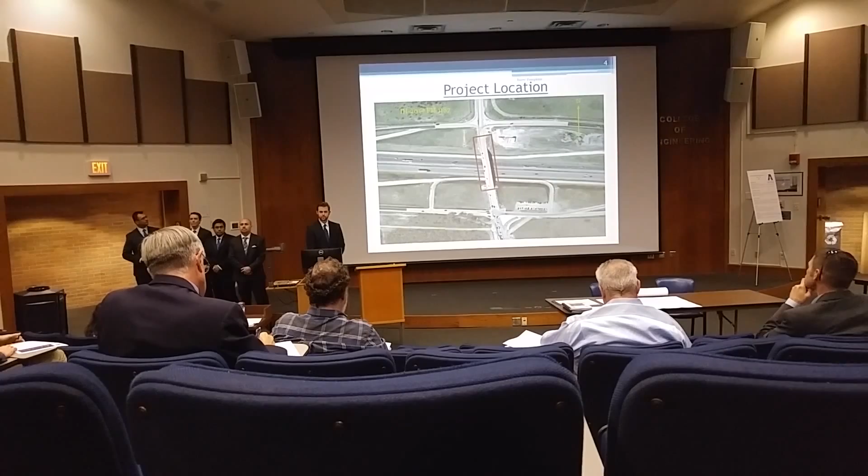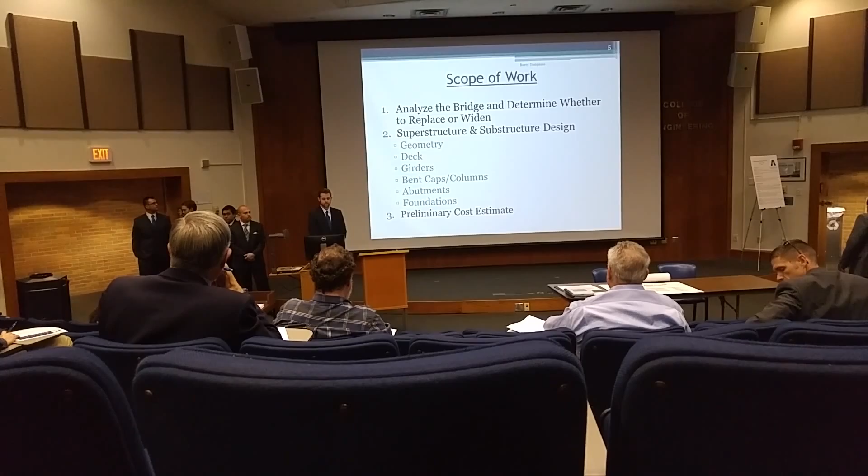Here's a close-up of the bridge we worked on. You can see I-20 runs directly below it. Our scope of work: we need to analyze the existing bridge and determine whether to replace or widen. We also need to design the superstructure and substructure parts for the deck, the girders, the bent caps, columns, abutments, and the foundation, as well as perform a bridge geometry analysis. And we also looked at a preliminary cost estimate.

A little bit about the background. The bridge was built in 1978, making it 37 years old. It is approximately 46 feet in width, with a length of 375 feet. There's 2 lanes with the center left-turn bay, and it has a current average annual daily traffic of 13,300 vehicles. It also has a current vertical clearance of 16 feet 5 inches.

Some design challenges: we had to work with geometric constraints, like vertical clearance. We didn't want to alter that. We also designed around the existing structure, and there's a 13-degree skew. We also had to consider connection details for the abutments and the deck. And a major highway, I-20, runs directly below it, so we need to consider minimizing traffic disruptions.

We split the responsibilities of the design into superstructure and substructure. I worked on the deck design, Javier worked on the girder design, Christian with the bent caps and columns, Jesse with the abutments, and Alfred with foundation design and the bridge geometry analysis.

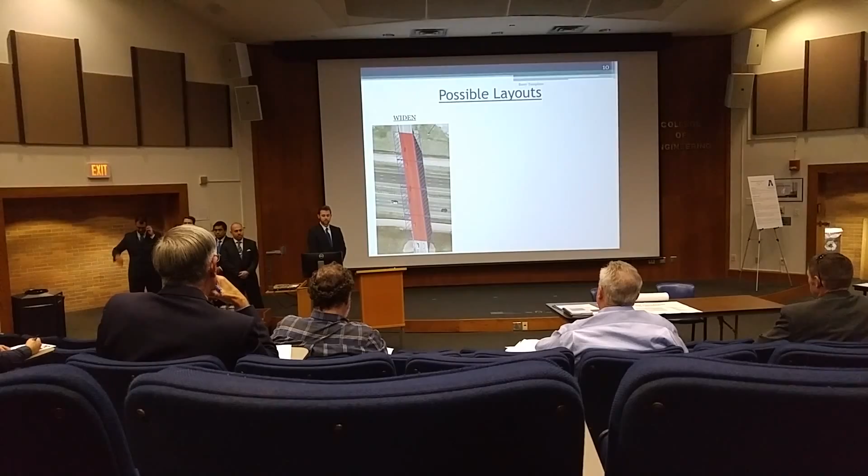Onto the bridge analysis. We considered 2 possible layouts. The first, we widen or replace, and later we considered the possibility of a twin bridge. However, we decided it was too costly, and we needed to purchase more right-of-way, so we eliminated that option, and we stuck with widen or replace. We also considered the existing conditions. The existing TxDOT report indicated a sufficiency rating of approximately 95 out of 100, meaning it is not structurally deficient, and it showed it's been reliable for 35 years.

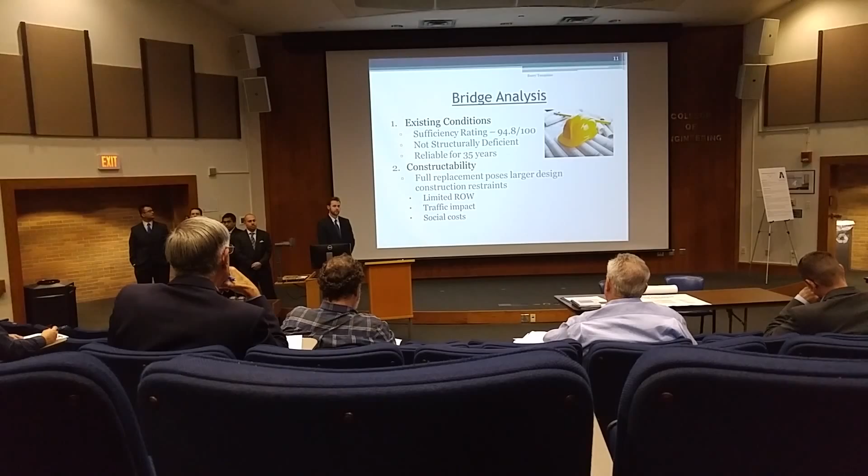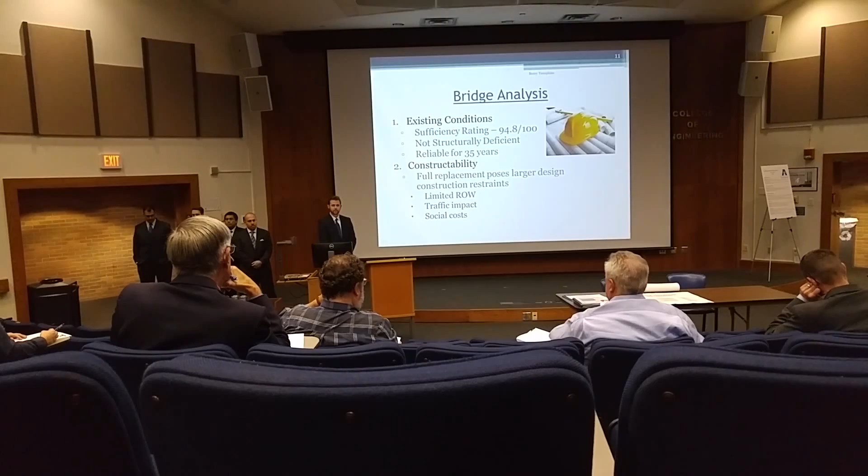We considered constructability. A full replacement would cause more construction restraints, such as a limited right-of-way and larger traffic impact, resulting in social costs such as fuel consumption. We also considered a life cycle cost analysis. We obtained a unit price per square foot from the TxDOT website, allowing us to calculate that replacing now would be about $3 million, whereas widening would only be about $2 million.

At 4% interest rate, replacement 35 years from now would be about $760,000. We chose 35 years because that is around the time the design life would end. Therefore, widening plus future replacement is still less than replacing now. So we chose to widen.

Onto the deck design. My scope of work: I needed to determine the loads on the deck and design the reinforcement accordingly. I also need to consider the connection details and the header expansion joints, as well as construction alternatives. Here are the tools I used for the project. The bridge will be under normal operational use, so the limit states Strength I and Service I apply, giving us the load factors to the right.

For the dead loads I need to consider the slab, the future ACP overlay, the T551 railing, which is the heaviest railing by TxDOT, and the sidewalk. For the live load, we use the AASHTO HL-93, which is the heavier option of the design lane and truck or design lane and tandem.

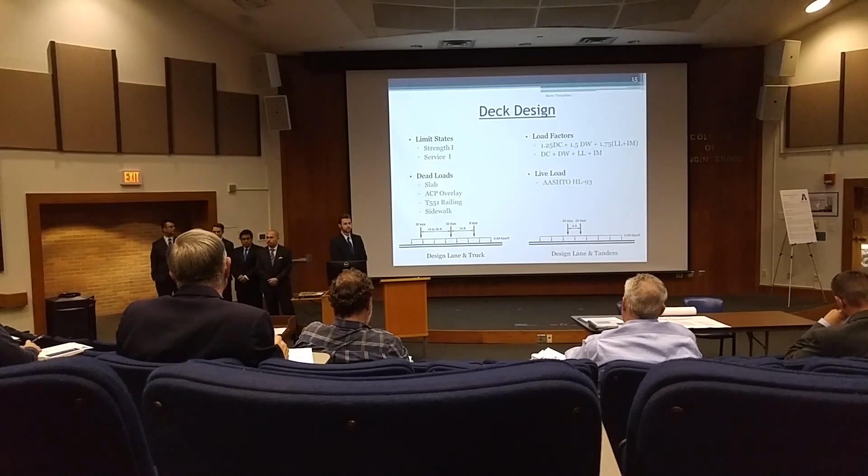For the reinforcement, I used the effective strip method and calculated the loads on a 1 foot section of the deck. For the longitudinal reinforcement, we need number 4 bars for the top and number 5 bars for the bottom, both spaced at 9 inches. And for the transverse reinforcement, I initially designed number 5 bars for the top and bottom, spaced at 6 inches. However, to properly connect to the existing deck, I need to alter that to 5.5 inches.

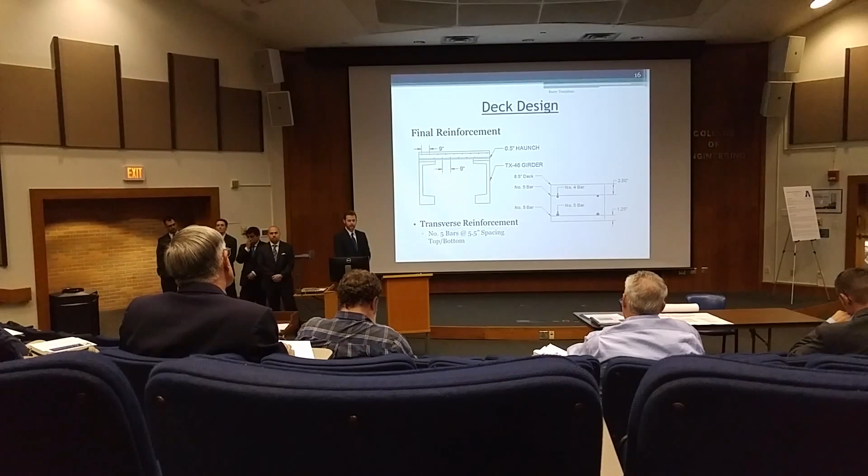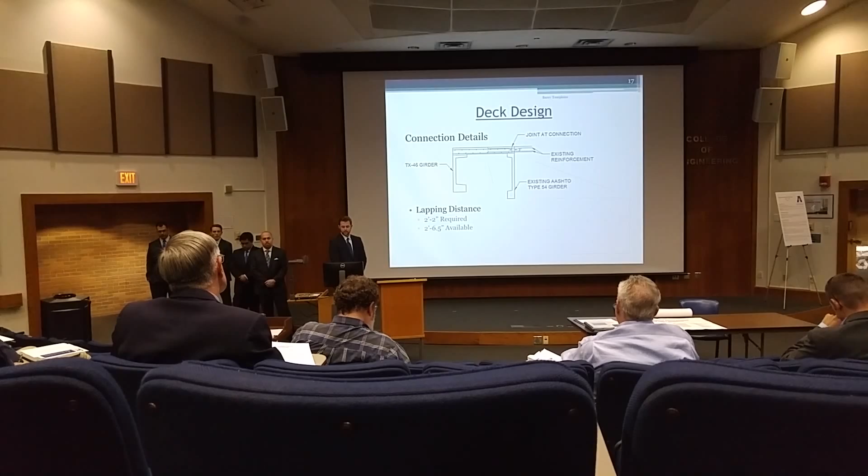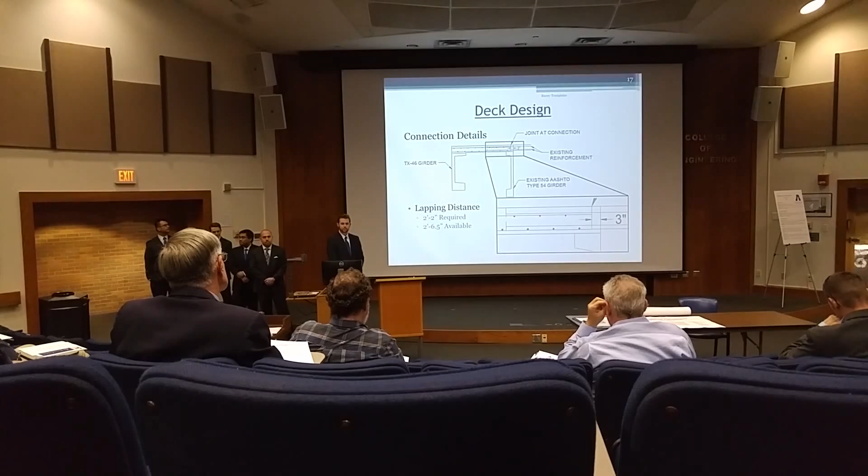In order to connect to the existing structure properly, we needed to break back the deck 3 inches off of the existing girder. This gives us about 2.5 feet of exposed rebar when the required lapping distance is 2 feet 2 inches. The existing deck is only 7.25 inches thick, whereas the new deck is 8.5 inches. So the rebar does not align perfectly, and in order to connect, we need to bend the rebar to connect the decks.

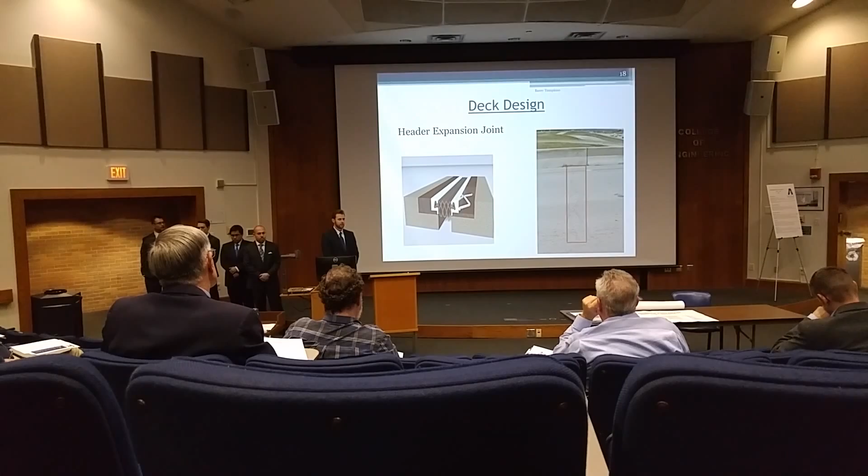Here's a picture of our site of the bridge. You can see there's cracking developed because of the joints. The current joints are doweled together, which is restricting movement and causing cracking in the asphalt, shown here. So we need to implement a header expansion joint, which allows movement between the deck slabs and also prevents cracking for the asphalt.

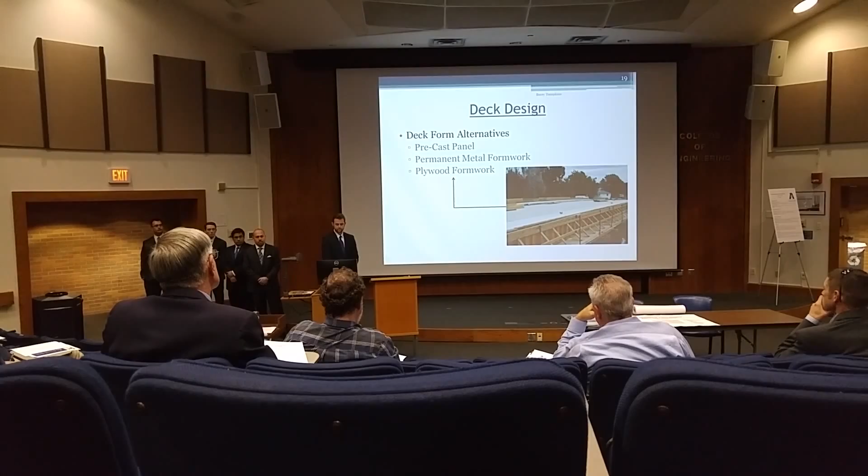Some deck form alternatives: we can use a precast panel. We can also use a permanent metal formwork, which supports the concrete as it cures. And there's also the plywood formwork. However, this is outdated and it will cause more traffic interruptions. We'll now be moving on to the girder design.

Good afternoon, my name is Javier Valdez, and I will be talking to you about my girder design.

The design scope for my portion was to come up with alternatives as far as girder types and the relative spacing, to assume the loading and calculate the loads on the girders, to use PGSuper Analysis, which is a computer program that aids in a preliminary design for the pre-stressing strands of the girders, which still have to be confirmed with hand calculations. And these are the tools that I use.

The first step in my design procedure was to calculate the live loads. I used HL-93 loading, AASHTO highway loading of 1993, as previously mentioned by Barry. After that, I calculated my dead loads, which include the railing, the slab, a 2-inch overlay, and a 2-inch haunch, all which sit on top of the girder.

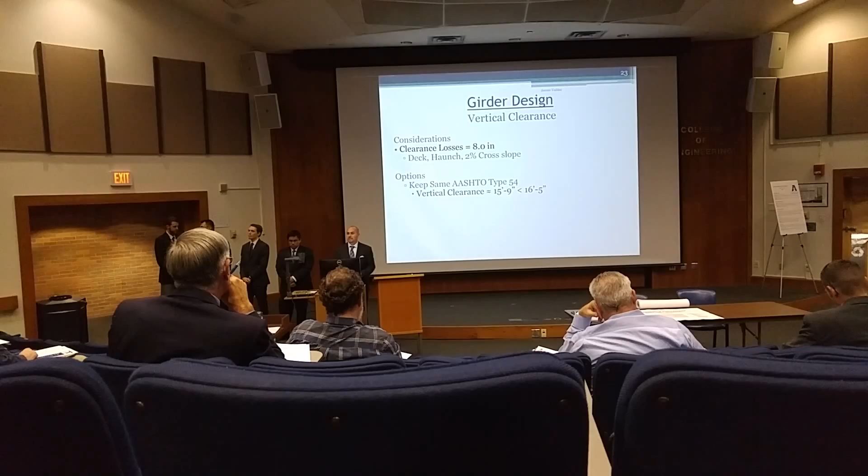Next was to determine the vertical clearance. Now, some considerations that I have to take into account were the 8-inch losses that resulted from the new deck, the haunch, and the 2% cross slope. Some of my options were, number 1, to keep the same AASHTO Type 54 girder as the one currently existing. This would give me a vertical clearance of 15 feet 9 inches, which is less than what we have now.

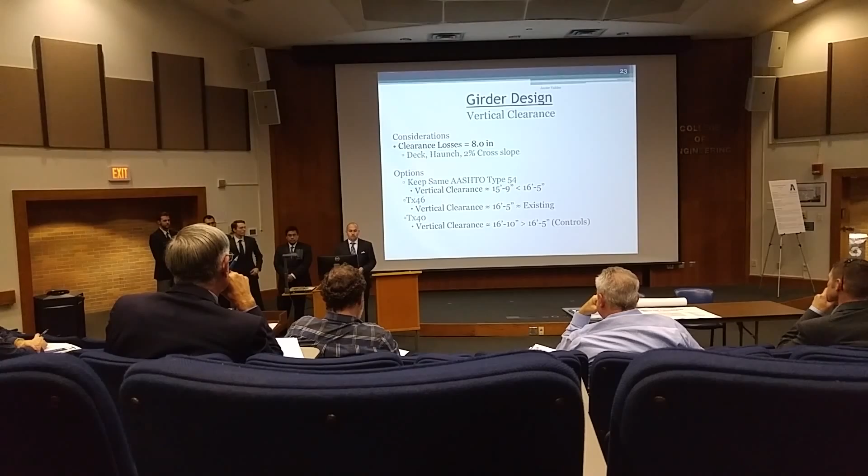Another option was to use a TX40 girder, which is a shallower beam. This will give me a vertical clearance at the edge of the bridge of 16 feet 10 inches, but the interior existing girders were still controlled at 16.5. My next option was to use a TX46 girder, giving me a vertical clearance of 16 feet 5 inches, which is approximately the same as what we have now. So the decision was made to go with TX46.

Now that we have chosen a girder, we need to come up with a spacing for it. The proposed addition to each side is 20 feet. The current spacing is 6.67. But I am limited in my design by TxDOT LRFD to a half-foot to 4.5 foot overhang from edge of the flange, and limits my clear span to be less than 8.5 feet.

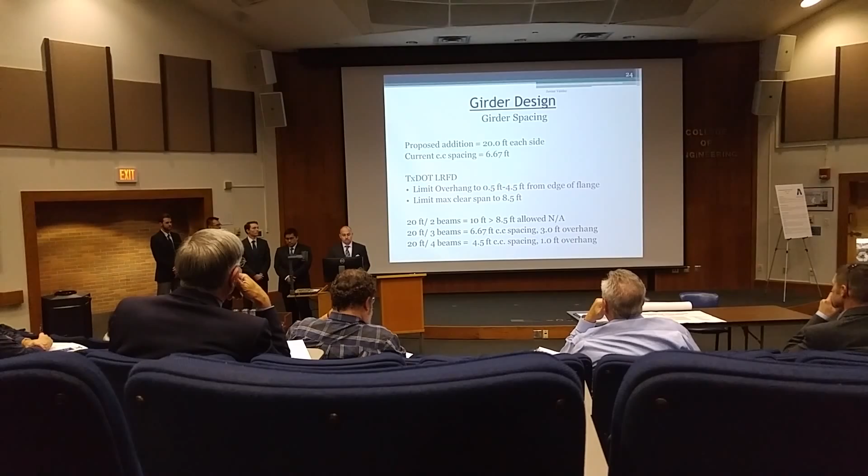So if we go with 2 TX46 girders, we'll have a center-to-center spacing of 10 feet, which is greater than the 8.5, so this design is not allowed. If we go with 4 beams, we'll have a center-to-center spacing of 4.5 with a 1 foot overhang, but this is not the most economical choice. We moved on to 3 beams at a spacing of 6.67 and a 3 foot overhang, which is very similar to what exists out in the field right now. So the decision was also made to go with this design using 3 beams.

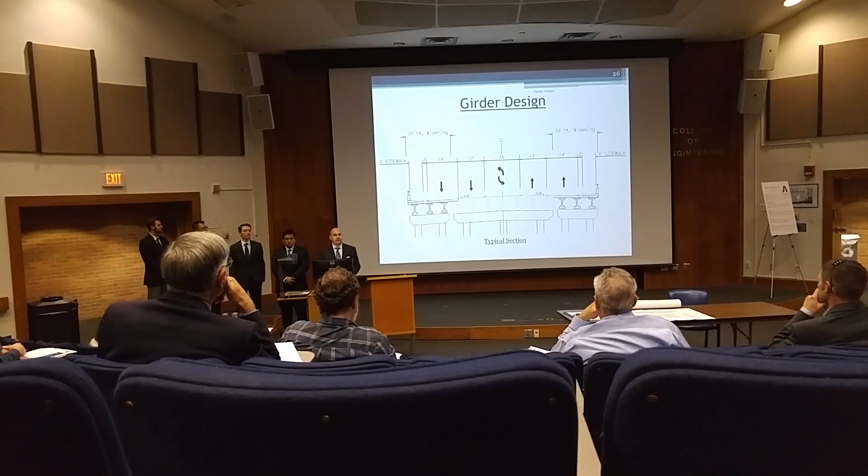We have 4 spans, 6 girders per span, giving us a total of 24 new girders that will have to be fabricated. 18 of those girders are 94.5 feet long, and 6 will be 89.5 feet long.

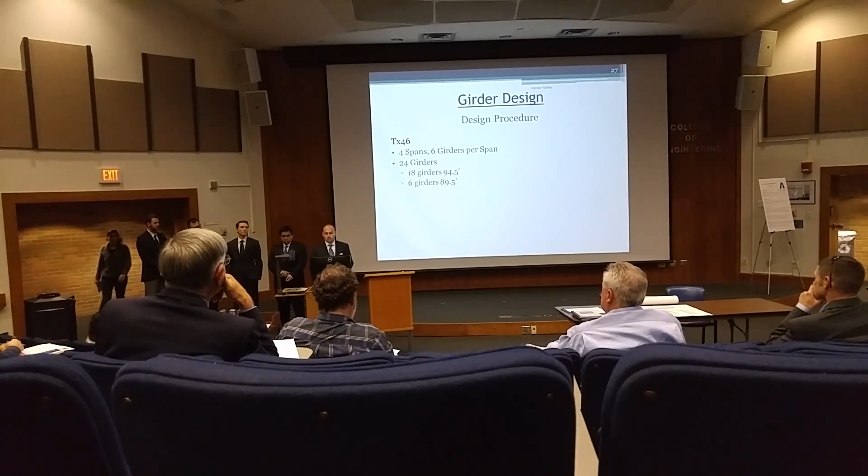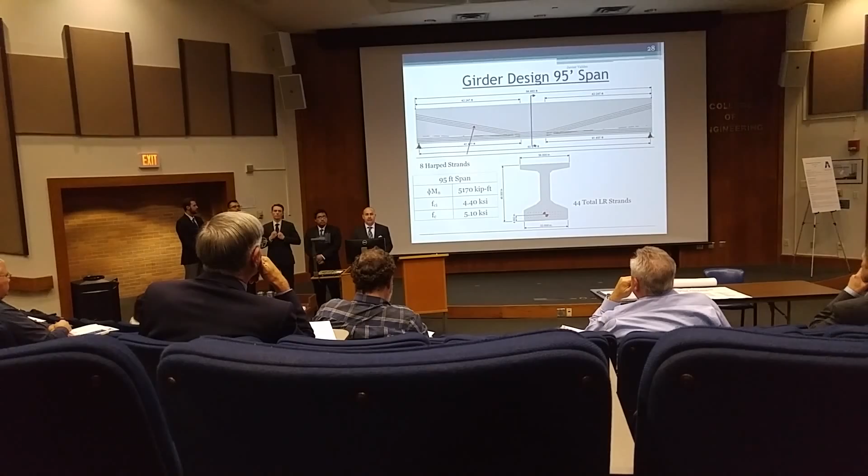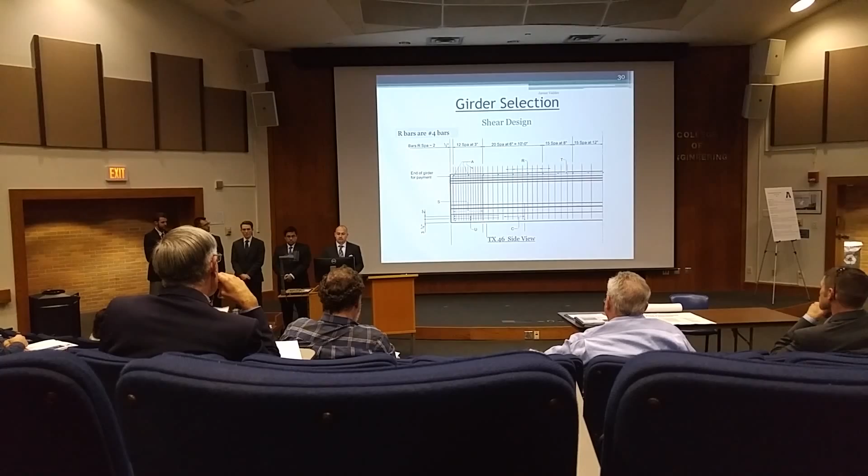This is the shear design. I want to point out that this is only half of the beam. The other half will be a mirror image of this. And this shows the R bars, which are the red ones, and they are number 4 bars. This is a cross-sectional view of my TX46 girder, also showing the shear reinforcement in red.

One thing I want to point out about this is the hook at the top is not to carry the girder or place it in place. It is to make the deck and the girder composite so they can carry the load. And as I mentioned earlier, I had to confirm all PG Super calculations by hand. As you can see, it gets very time consuming, but thanks to my PDs and my group members that gave me positive encouragement, I was able to complete this task.

And we'll be moving on to bent caps. My name is Mendoza, and I was responsible for the bent caps and columns. My scope includes design alternatives, CAP18 inputs and analysis, steel reinforcement, columns, and column protection. And here are the tools I used. CAP18 is the program we use to analyze the abutment caps and bent caps, and it performs calculations on statically indeterminate continuous beams.

The existing structure consists of 3 interior bent caps with 3 36-inch columns. The cap is 45 feet long along skew, 39 inches wide, and 42 inches tall. To widen the bent cap, we have 2 options. First is to extend the existing cap and tie in steel reinforcement. However, this is used for small widenings and requires breaking concrete under the girders. Since this is a safety issue, we will not be using this.

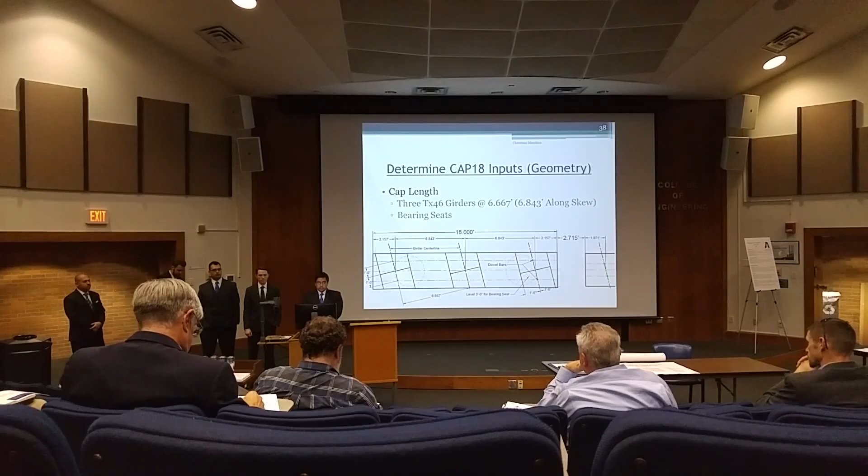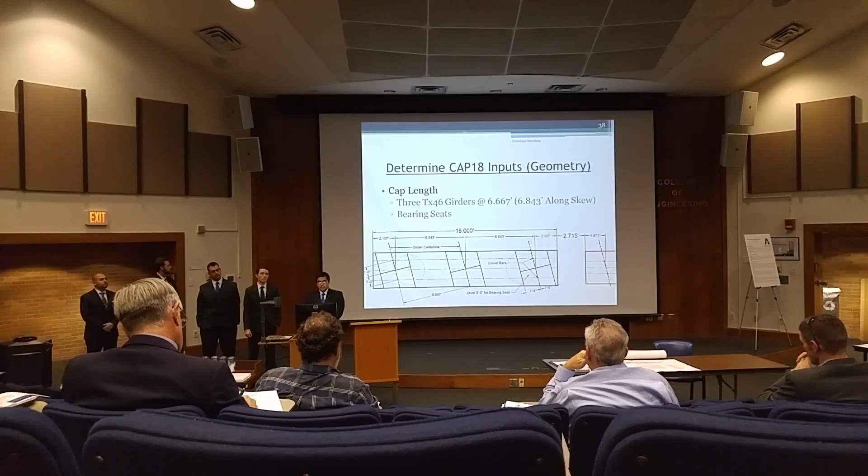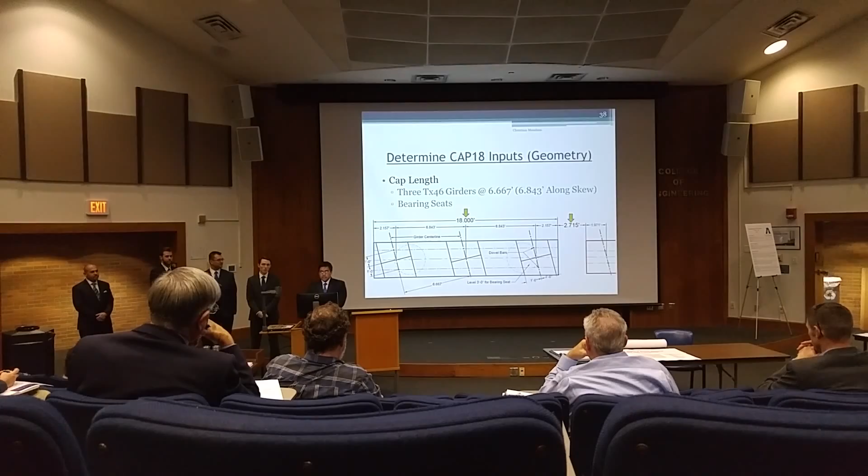CAP18 also needs the geometry of the cap being designed. The cap length has to accommodate the 3 new TX46 girders and their bearing seats, which gives us a cap that is 18 feet long. This leaves a gap of about 2.75 feet, which gives the contractor enough room to form the cap. Also, since our bridge is made up of simple spans, TxDOT uses dowel bars that are located on the center line of bearing for the exterior girders. These are vertical bars that go into the cap, through the bearing seat and bearing pad, and into the girders.

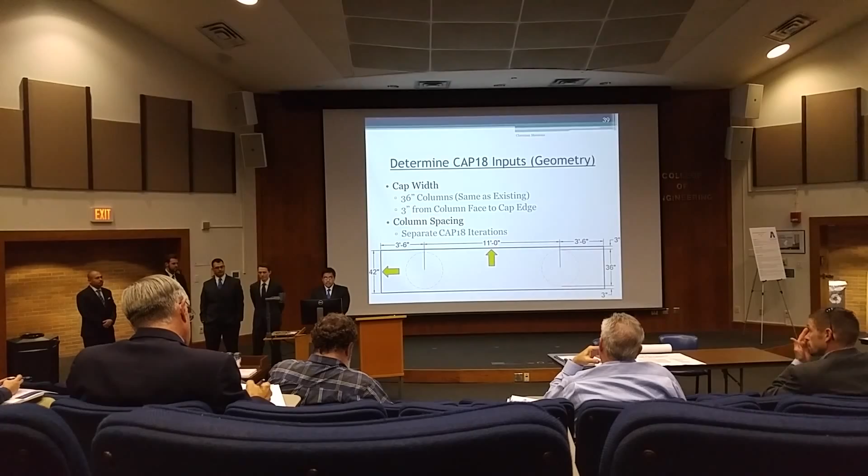Since we're using TX46 girders, the TxDOT LRFD specifies that we use 36-inch columns and a cap width of 42 inches. This gives us 2 3-inch gaps from the column face to the cap edge. This is used to account for errors in construction. Column spacing of 11 feet was determined by separate CAP18 iterations; each iteration will have different column spacing, and we compared the moments to find which iteration gives us the lowest maximum moments.

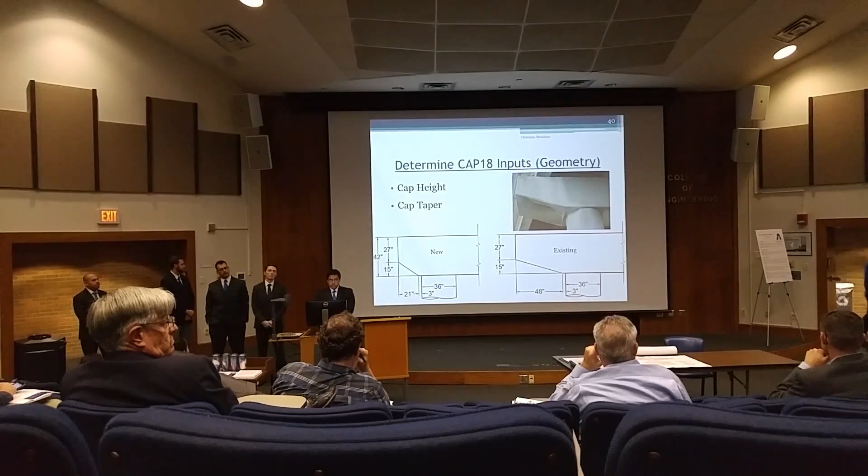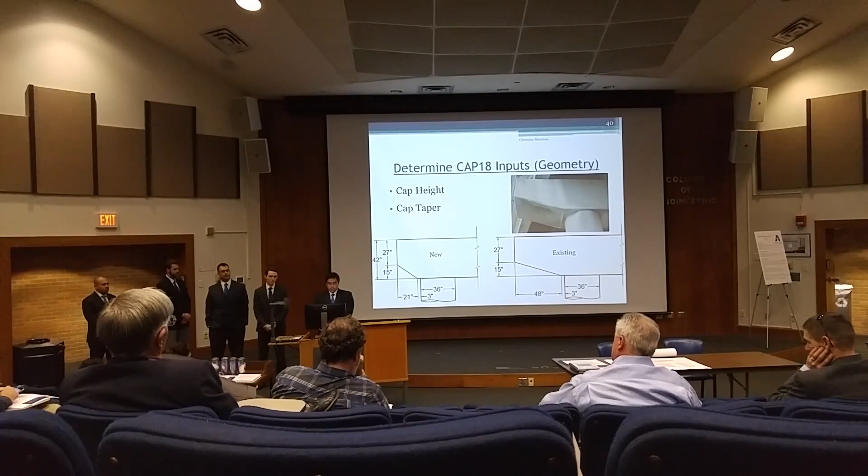The TxDOT LRFD states that the cap height has to be equal to or greater than the width. The existing cap is 42 inches tall, so we will use 42 inches for our new caps to match that. For aesthetic purposes, the cap taper will also try to match the existing, but will have to be reduced to 21 inches long to provide that 3-inch gap between the column face and the bottom edge of the taper.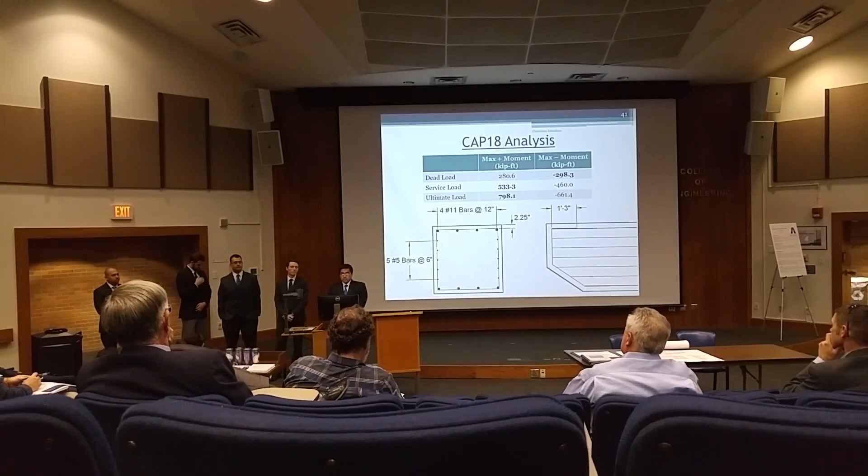CAP18 gives us three pieces of information that we will use for our design. First is the maximum moments, which we will use to calculate the longitudinal reinforcement. We will use 4 number 11 bars top and bottom, and 5 number 5 bars on the sides. These bars are extended throughout the length of the cap, leaving the 2.25 inch cover. There are 2 number 5 bars here shown in red that are located at the end of the cap that are used to close the steel cage and help hold it together. The 1 foot 3 inch is the development length of the number 5 bar.

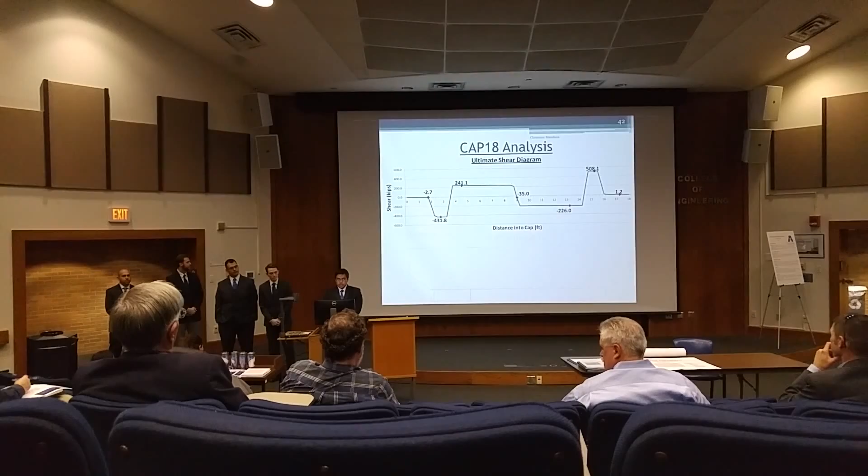CAP18 also provides us our shear along different points of the cap, which we can use to design our transverse reinforcement. We have 5 number 5 stirrups in the overhangs, and 9 number 5 stirrups between the columns. And lastly, CAP18 also gives us our unfactored service loads for the foundation design.

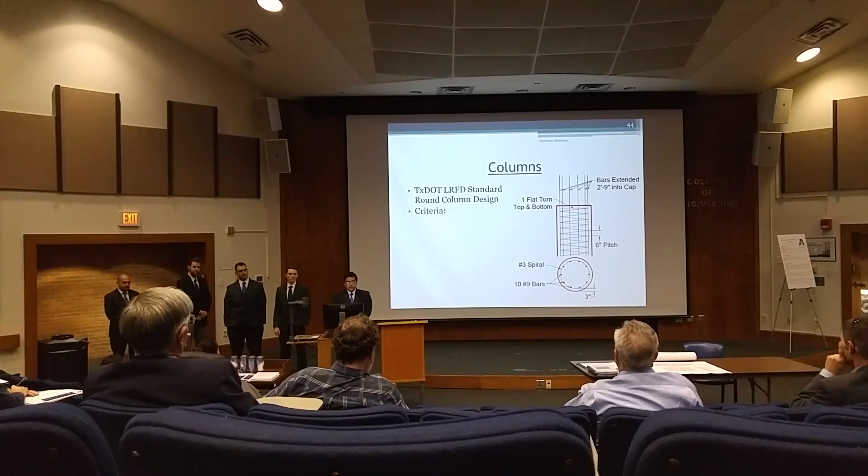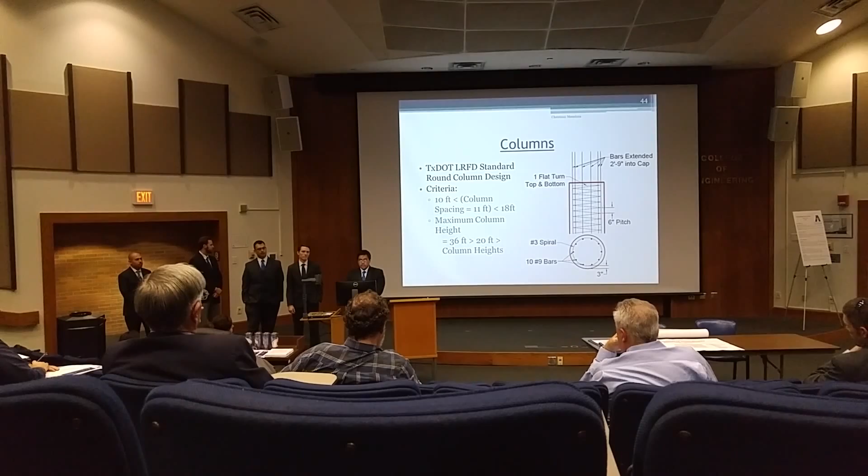The existing columns use the TxDOT LRFD standard round column design for columns in multi-column bents. And there are 2 criteria that must be met to use this column design. First criteria is a column spacing between 10 and 18 feet. In our design, we use 11 feet. And the columns cannot be higher than 36 feet. Since our vertical clearance is 16 feet 5 inches, all of our columns will be below 20 feet. So our new columns can use the standard.

Since our bridge is an underpass, with our columns a few feet away from the roadway, we need to consider column protection based on criteria in the AASHTO LRFD. And due to the vehicular traffic of I-20, it is deemed necessary that we need to protect the columns.

What we can do is we can construct a barrier. However, this requires attenuators, and since I-20 has full depth asphalt pavement, those barriers will need drill shafts. This will result in more traffic control on I-20, and since we want to minimize traffic disruptions, we will not use the barrier.

Another option is to design the column for collision using 600 kip equivalent static force mentioned in the AASHTO LRFD. However, from our bent cap design, we have 6 2-column bents, which are non-redundant structures, meaning that if a force that exceeds the standards hits the columns and causes one to fail, that section of the structure will fall. Also, since we can't change the existing columns, they will not be protected. So we cannot use this option.

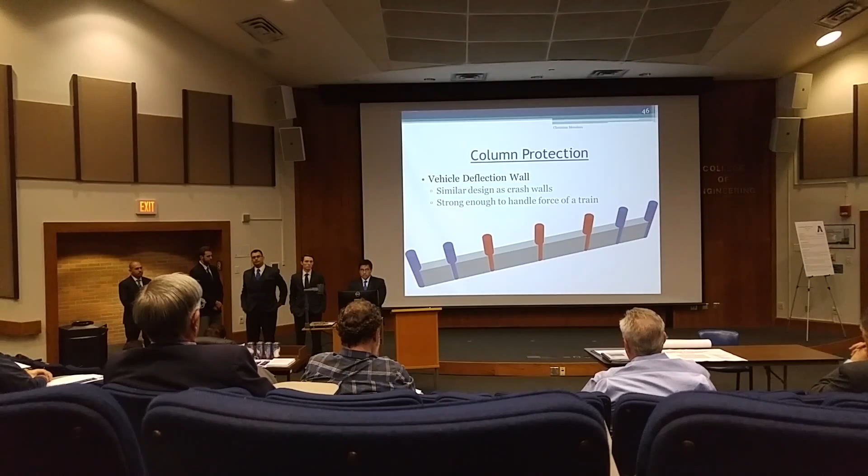What we went with is a vehicle deflection wall, which is a series of 8-foot tall walls that connect each of the columns and forms a giant shear wall. This will help protect those 2-column bents and the existing columns. What it does is it redirects the force of the collision and distributes it along the length of the wall. Its design is similar to crash walls, which are used in railroads. And now onto the abutment design.

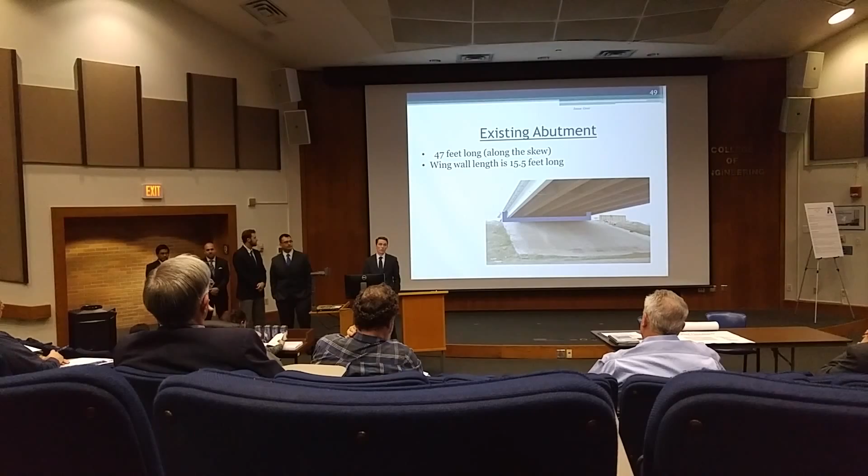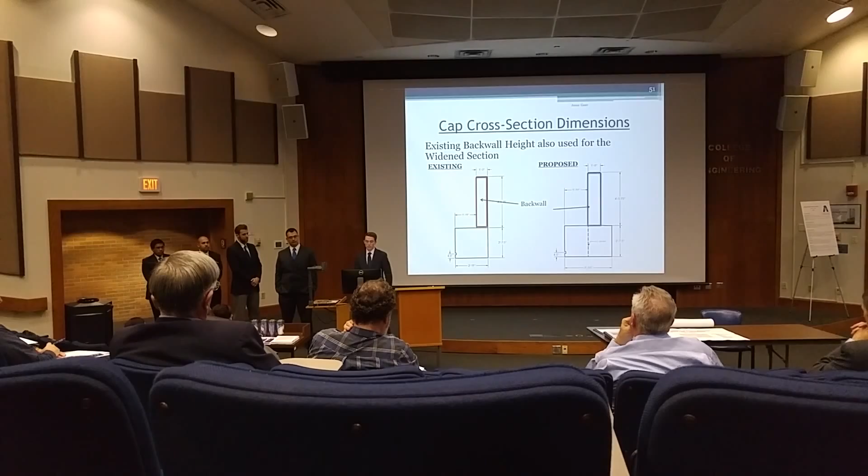Now, here's the existing abutment. That's the face of it. It's 47 feet long along the skew. The wing wall is 15.5 feet long. And this is a cross-section of the cap and the back wall. Now, the TxDOT LRFD requires us to line up the face of the back wall with the center line of the cap and the line of the drill shaft underneath it. And this is for a more structurally stable design, and also the LRFD requires us to line up the back wall, face of the back wall, and the face of the cap with the existing.

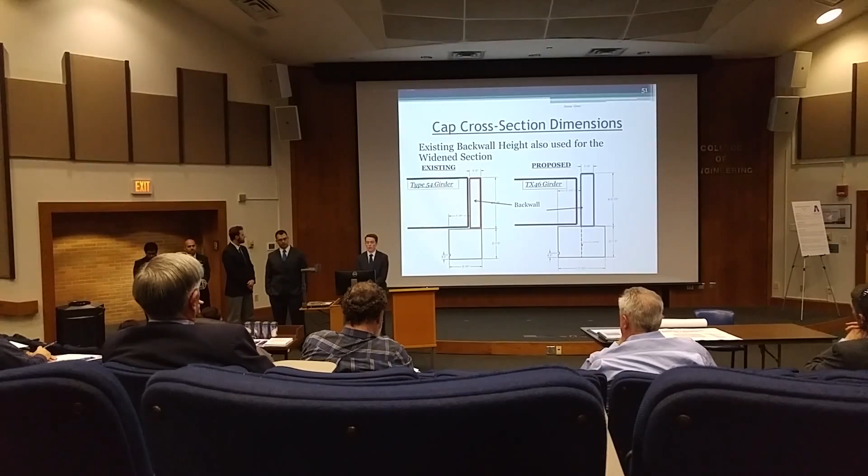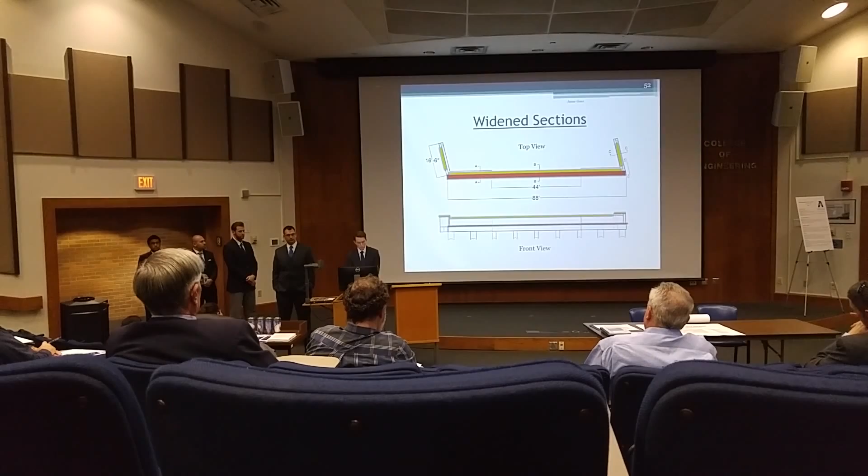Now these are the girders that are on the cap, and the dimensions of the cap, we're not able to design those until we select a girder, which Javier selected a TX46. Now we can find the dimensions of the proposed cap. This is the total widened section of our bridge. The red is existing, blue is widened. And there's a top view and a front view. This is the top of the back wall as well as the top of the wing walls and how they correspond with the front view. And this is the top of the cap in front of that back wall and how it corresponds with the front view.

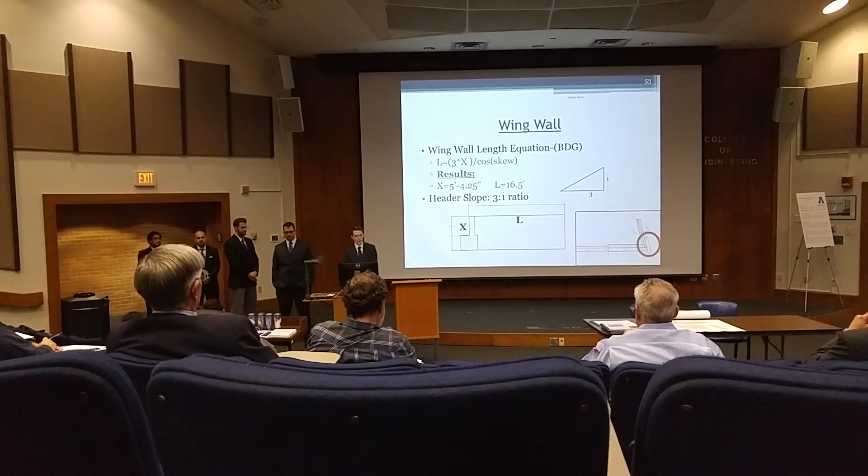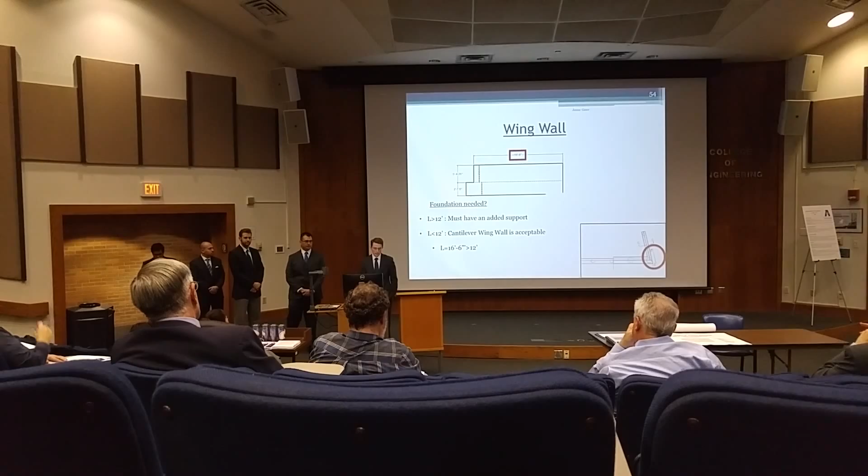Now the TxDOT LRFD, it refers to actually the bridge design guide, the bridge detailing guide. And it gives us a relationship between the length of the wing wall, the height of the back wall, the skew, and the header slope. The header slope is 3:1 ratio. It's already given in our existing plans. And with that, we can find the length of the wing wall. In this case, our wing wall is 16 foot, 6 inches that we have to design for.

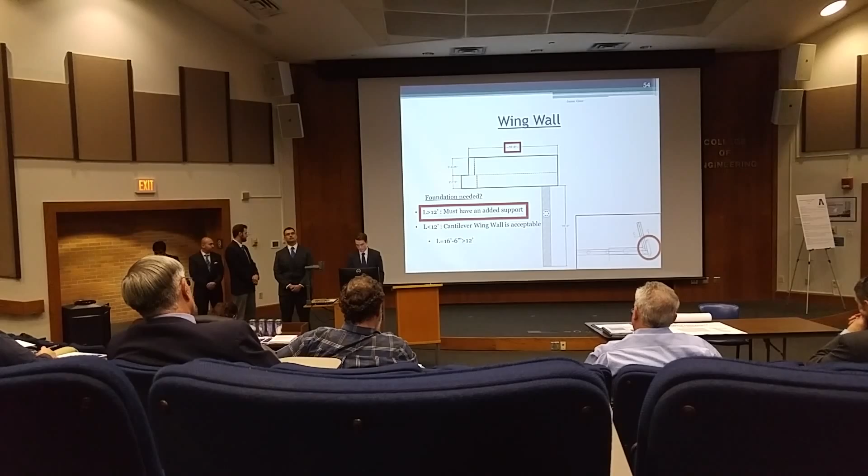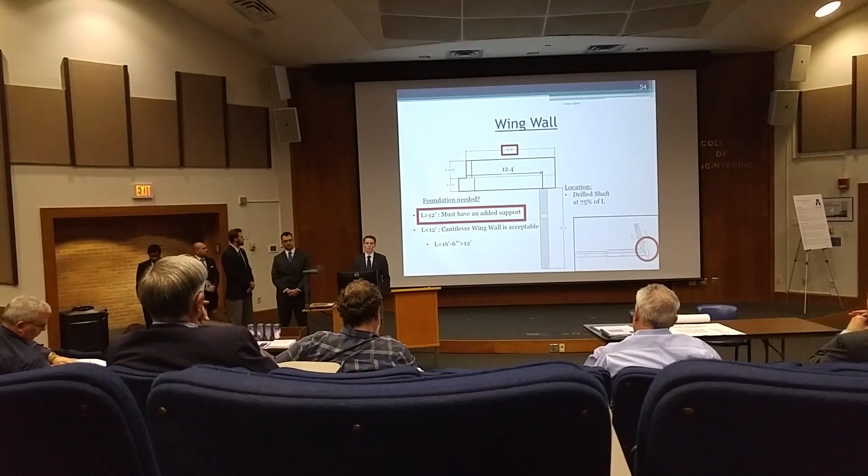Now the TxDOT LRFD, it requires any wing wall that is larger than 12 feet to have a foundation at the end of it. Now the foundation that we use is identical to the existing foundation of the existing wing wall. That is exactly what the LRFD requires us to do. So the existing is 18 inches in diameter and it has a 16-foot embedment into the ground. Now the location of this drill shaft is 75% down the length of that wing wall, which leaves it at 12.4 feet.

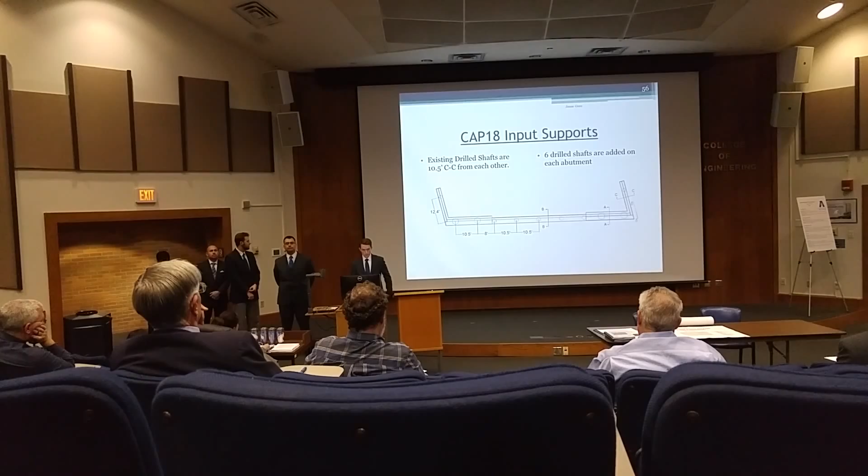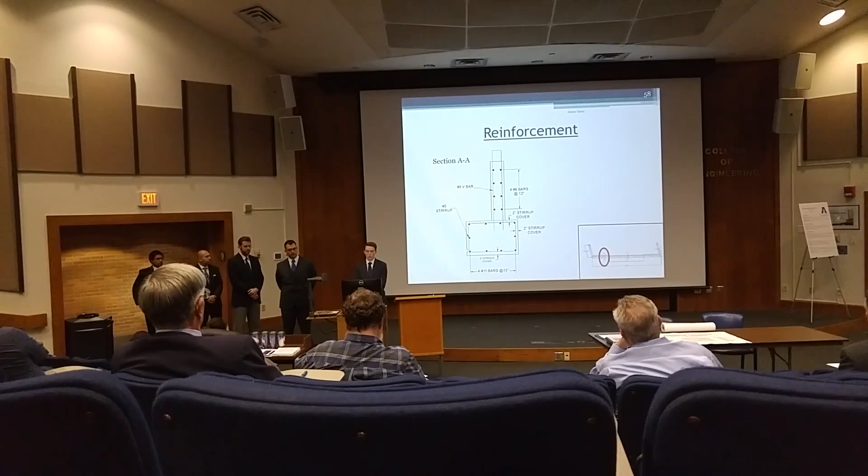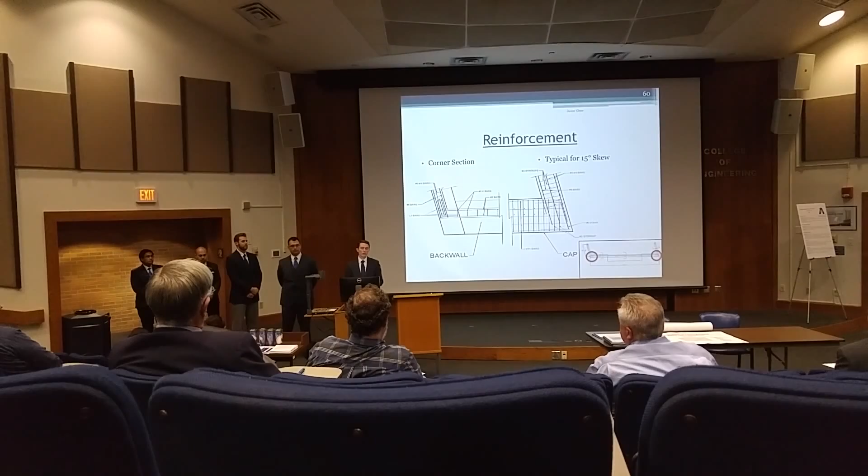And here's a cross-section of our cap and back wall, and this is the flexure reinforcement. This is the cross-section of our wing wall and the reinforcement for that, and this is the corner section of where the wing walls intersect with the cap and back wall. Now, all of these sections geometrically fall within an already pre-designed TxDOT structure. So I used those to make it a more consistent and a more reliable design and product.

Now, as I just said, the back wall is already a pre-designed TxDOT back wall that fits the geometry of it. They gave us the number 5 bars at 1 foot, and the cap I actually designed through the shear that the Cap 18 file gave us, and that has the number 5 bars at 6 inches.

Now for connecting into the existing abutment, we have 3 options. The first option is lapping each steel rebar, but that requires us to break back at least 9 feet into the existing abutment. This is going to require us to go under several girders, so that's pretty dangerous. We're not going to go with that. We thought of coupling as well. Coupling requires the bars to be the same size and the same location, and that is not the case in the existing compared to the proposed.

So our only option really was to use the dowel bars, and what you'll see here on the bottom is the dowel bars. You need to drill into the existing abutment at an angle so that the steel can fully form with the epoxy that they use to connect to the existing.

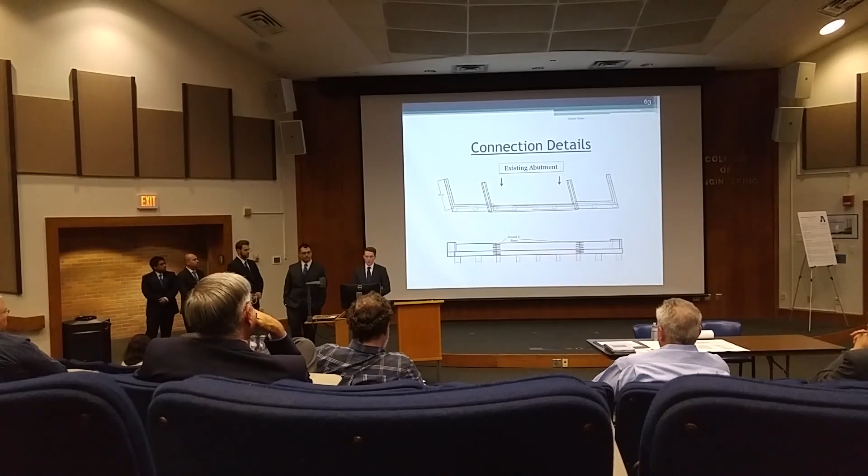Now on top right here, you'll see that this is an existing abutment, and this is how we widened it. Now the existing wing walls, we're leaving the decision of whether to keep them or to take them out completely up to the contractor, whichever is more convenient for them. And now we have foundations.

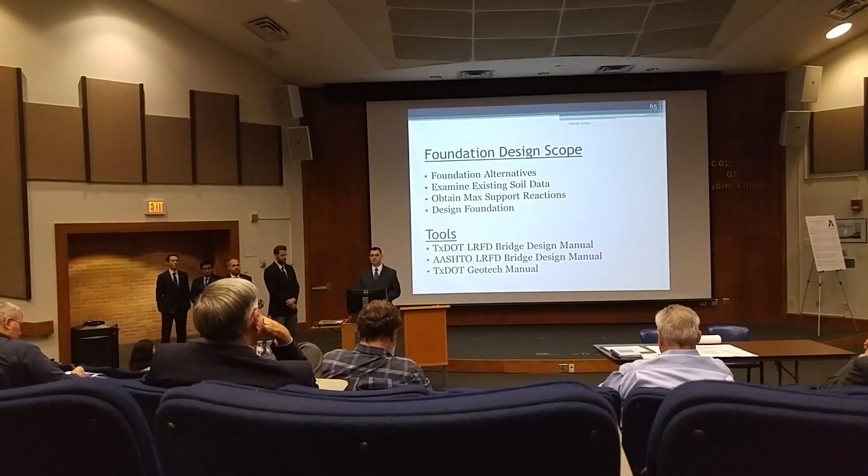Hello everybody, my name is Alfred and I designed the foundations for our project. Our scope began by examining a few alternatives that were available, and then went from there to examine the soil data that was given from the existing plans. Secondly, I received the max reactions from my Cap 18 guys. And then finally, I began my design. The tools I used were the manuals mentioned before by my teammates, but in addition, I was able to take advantage of the TxDOT Geotech manual.

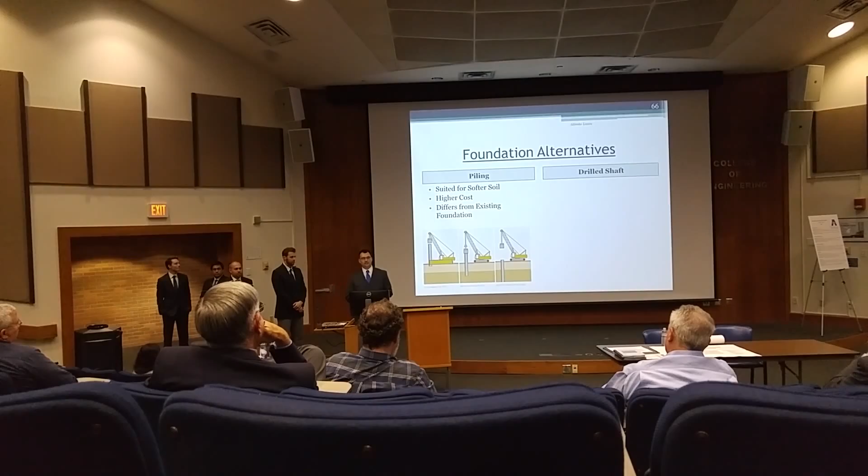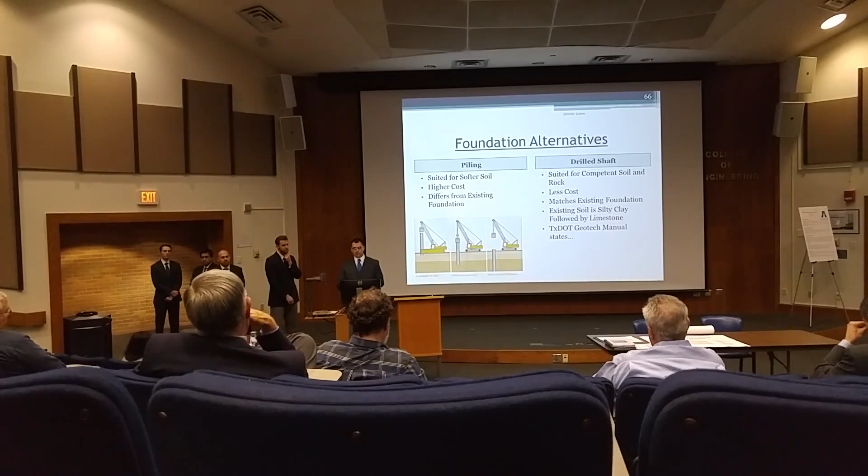So some alternatives. Basically, it boiled down to two alternatives. Piling, which is more suited for softer soil, can carry a slightly higher price tag due to the scarcity of it in the DFW area, and on top of that, it would differ from the existing foundation conditions. The next alternative is drilled shaft, which is more suitable for competent soil and hard rock. It would actually cost less because there's an abundance of drilled shaft used in the DFW area, as well as match the existing foundation conditions. Existing soil is silty clay, followed by limestone, which is near the surface. And the TxDOT Geotech manual states, when widening a structure that has drilled shaft, continue to use drilled shaft. So our choice was pretty simple, drilled shaft.

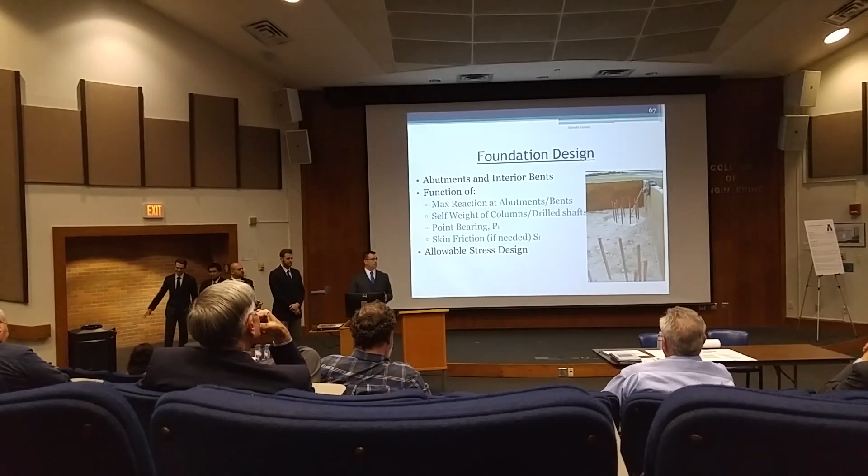So I'll be designing the foundation for the abutments and the drilled shaft for the interior bent columns. It's basically just a function of the max reactions, the self-weight of the column and drilled shaft, and the point bearing, as well as the skin friction if needed. This will be an allowable stress design, which differs from the LRFD method used by my teammates for their structural members. This is a TxDOT preference. And that's a picture of the actual job site with one of the drilled shafts already poured, before they actually cast the abutment.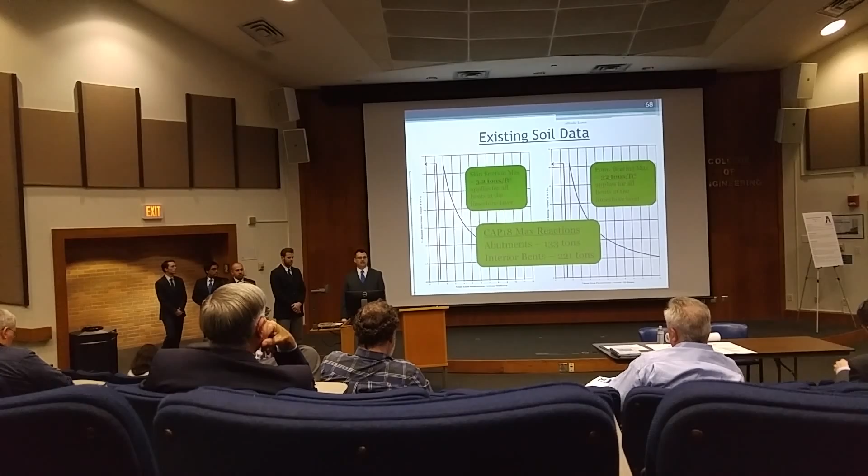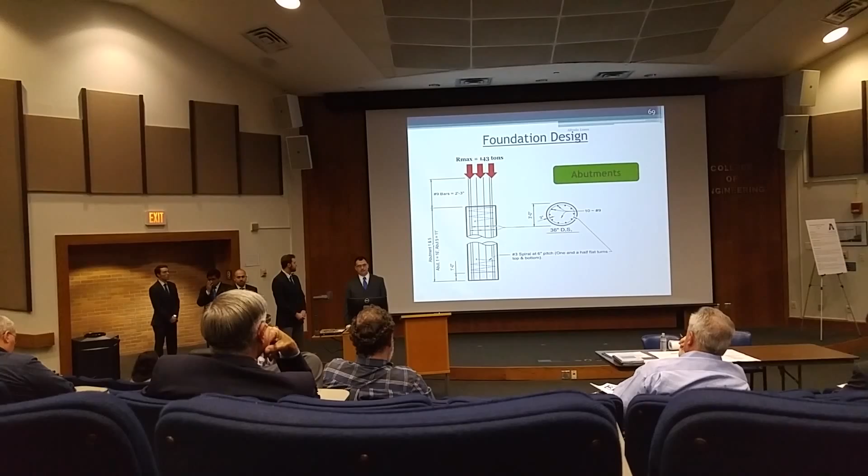In addition to that, the Cap 18 max reactions, which were given to me by Jesse and Christian, ended up with 133 ton and 221 ton max reactions for those members, which aided me in my next step, foundation design. So for the abutments, I used a 36-inch drilled shaft with 10 number 9 bars and a number 3 spiral at a 6-inch pitch. I was able to derive a max load combining that max reaction with the self-weight of 143 tons bearing down, to be offset by the allowable point bearing of 226 tons from the soil.

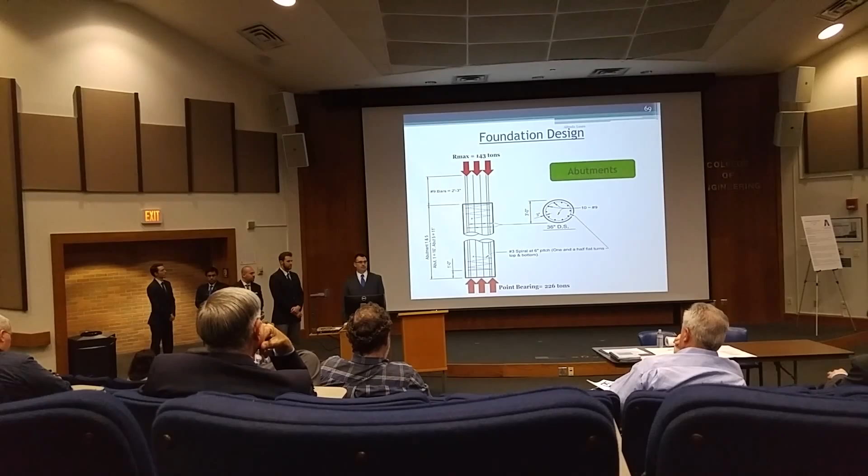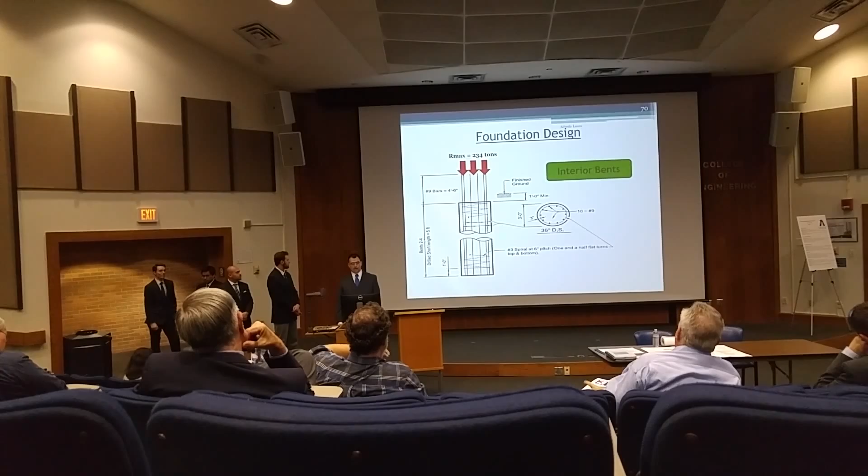This was more than sufficient for this load, so we can neglect the skin friction and call this an all end bearing. Secondly, I moved on to the interior bents 2, 3, and 4. Similar design, which will match the proposed column diameters of 36-inch drilled shaft with 10 number 9 bars, with the R max bearing down of 234 tons and the allowable point bearing of 226 tons, necessitating a small amount of skin friction of only 8 tons.

However, due to the nature of these tables that I derived these values from, the factor of safety of 2, we can basically just neglect that skin friction as it will never fully engage. Therefore, this is also an all end bearing. I'm going to move on to the bridge geometry, which is actually a genesis point for our project. It was actually at the beginning, but to make it flow better, we moved it to the very end.

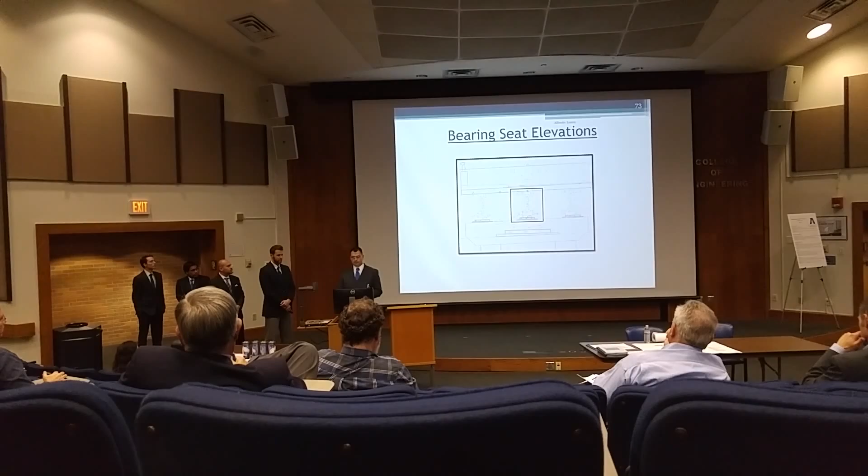It's basically just a program capable of performing multiple simultaneous geometric calculations for the sake of plotting bridge superstructures and providing these key detail elevations. Now, the first key detail elevation I'd like to mention are bearing seat elevations. As you can see in the picture, this is a cross-sectional cut of the widened portion with the three girders. I'm going to zoom in. What you see right there is the bearing seat. It's a very important elevation when constructing this bridge for the contractors. They need to build this bridge up to the right specific elevation in order for both ends to meet.

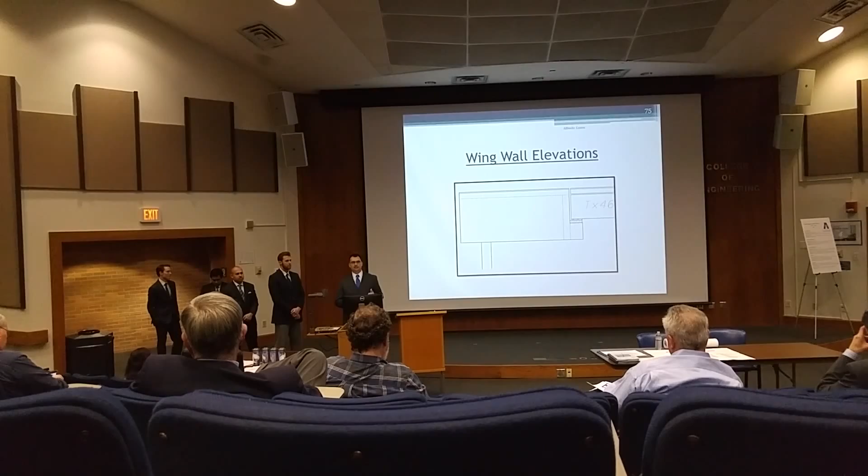And I was able to provide a table of finished elevations for all the bearing seats, which was provided to me by BGS. Next, you have top of column elevations, which are what they sound like, top of column. And once again, another key elevation for contractors in order to place this bridge in a precise location. And again, a table of finished elevations. Moving on to the wing wall, as mentioned by Jesse, I was also able to provide these key detail elevations, and due to the geometric skew of the bridge, these elevations were definitely going to be important for the contractors. So these XYZ points, as you see here, I was able to provide those using the BGS program. And again, another table of finished elevations for those points.

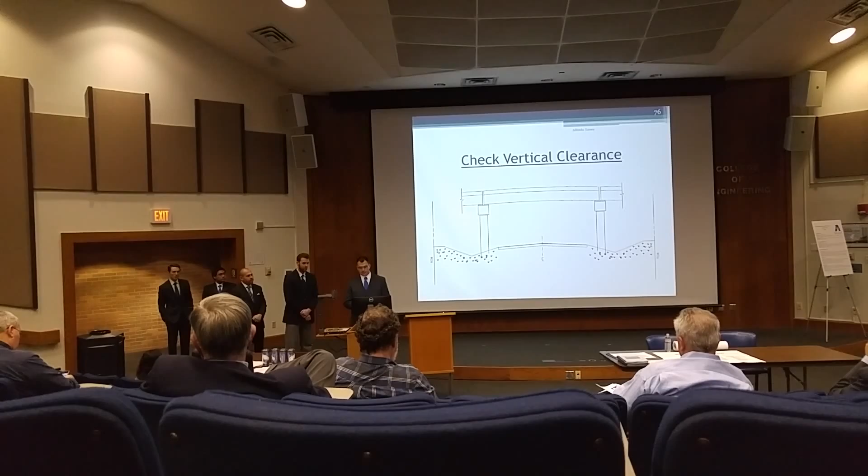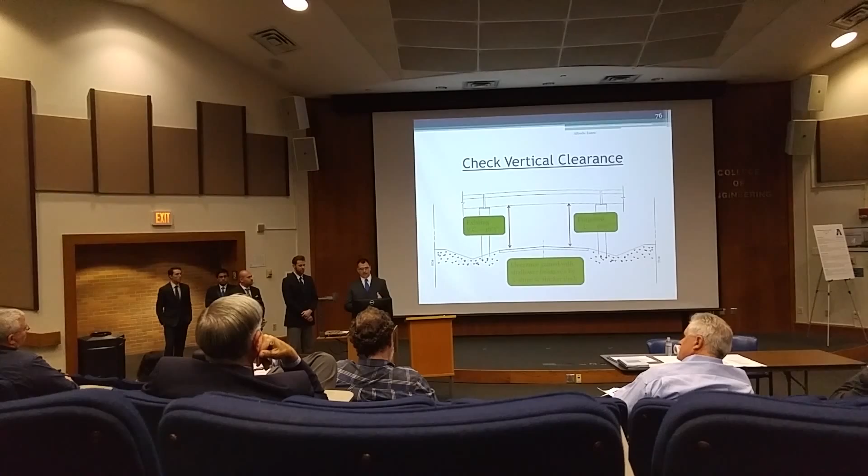And finally, to check the vertical clearance as mentioned by Javier, the BGS program did the calculations for me with the data that I put in. And from the existing vertical clearance, we had 16 foot 5 inches. We were trying not to lose any. So, with the shallower beam, thicker deck, thicker haunch, and a cross slope, we came out that our proposed vertical clearance will be approximately the exact same. So that's a very good thing.

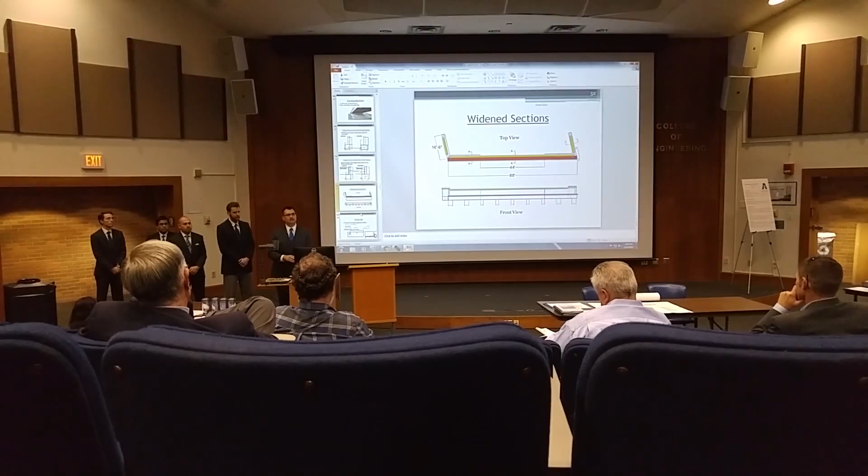You have to ask it because you took my computer class, right? Yes, I did. And you were my favorite student, so can you go to your PGSuper output where you show the profile of your strands?

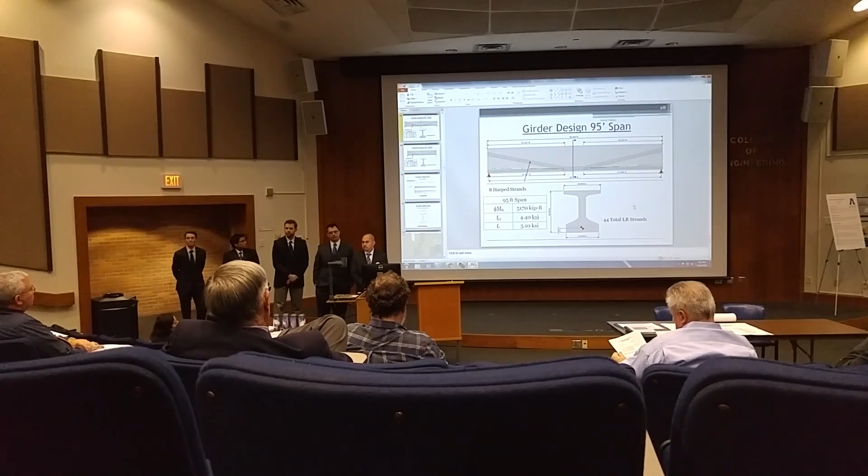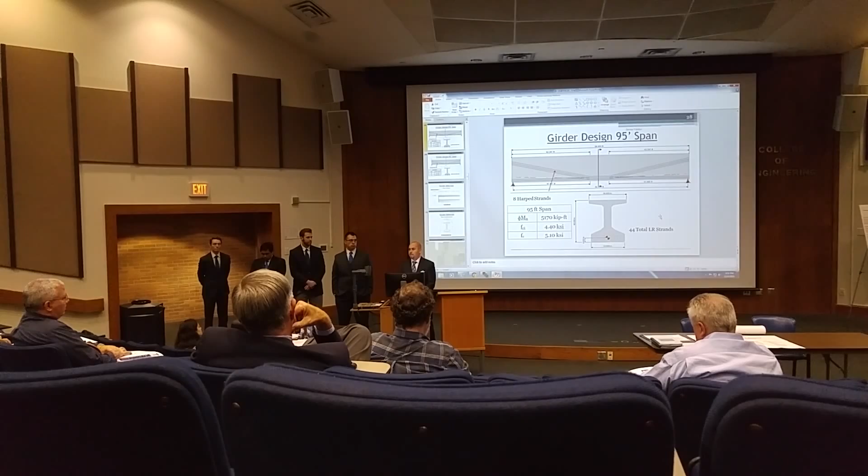When you do the black box, you understand what you did. For example, you made those strands inclined. Yes, I harped the strands. Then why was it done? That's done to alleviate the tension stress that develops within the beam because of the prestressing of the strands. And also, did you go into the program to see what prestressing losses you used? Yes, we had 10% losses. Why did you use 10%? Was it based on practice? No, it has the long-term losses and the immediate losses. Good. Very useful. Thank you.

First of all, I want to compliment you on your alternative analysis that you did at almost every point. I thought that was really excellent. Even though sometimes it didn't matter because you were constrained by some very simple rules of thumb, you had to use a drill shaft. But nice job. One of the better bridge projects I've seen. Thank you. I appreciate it. I would drive over it, yes.

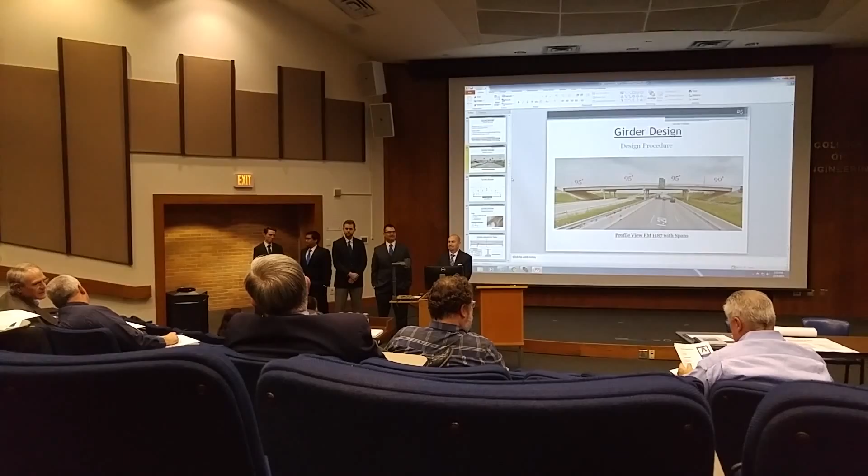I know you posted your hand calculations up there. Yes, I did. Did the rest of you at least do some hand calcs to validate some of the results you get from these? For myself, I did some hand calculations on the horizontal and vertical alignments, making sure that they were as built from the plan, that they actually did tie. They weren't as extensive, maybe several sheets, but not to the extent of Javier's. In the abutments, I calculated the caps, flexure, and the shear, and also for the back wall. But the back wall is almost the same as the existing, so we just used the standard redesign. And also a few hand calculations for the loads from the foundation to the drill shaft, just maybe 2 or 3 pages. Nothing as extensive as Javier's.